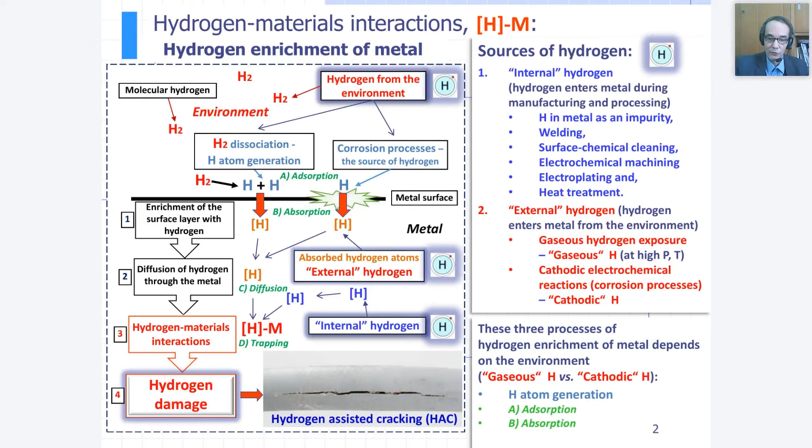What components are affected? Particularly tubes and pipelines in the power and oil and gas industry, also military aircraft, all components exposed to seawater, also automotive components are exposed to hydrogen embrittlement. Of course, different parts of the hydrogen chain, like hydrogen refueling stations, pipelines, as I mentioned, also fasteners. And at the end we have hydride embrittlement, which is typical for metallic alloys used in nuclear systems, and I will not talk about that.

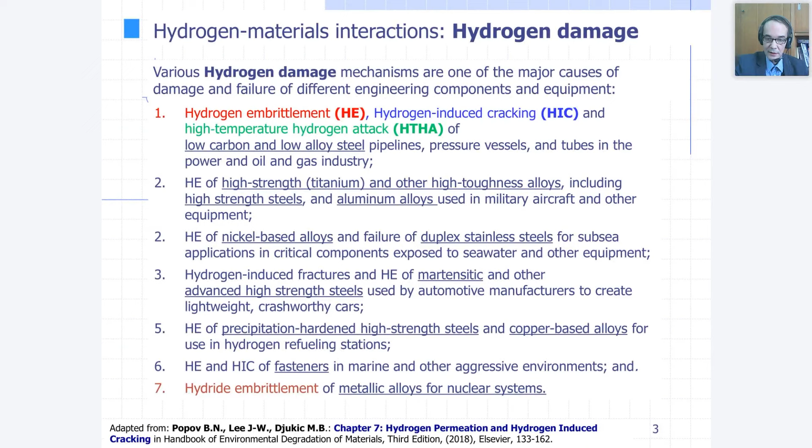Almost all structural materials are affected by hydrogen embrittlement and other hydrogen damage mechanisms, like low carbon and low alloy steels, also advanced high-strength steels, martensitic steels, and other grades of steel, but also aluminum alloys, nickel-based alloys used in seawater and other equipment, and also copper-based alloys. But recently it has been confirmed that high entropy alloys are also very susceptible to hydrogen embrittlement. So there are a lot of mechanisms and a lot of materials which are prone to hydrogen embrittlement.

What is the definition of hydrogen embrittlement, to make a clear distinction between hydrogen embrittlement and other hydrogen damage mechanisms? Hydrogen embrittlement can be defined as hydrogen-caused deterioration of mechanical properties of most metallic materials. So hydrogen embrittlement is one mechanism of hydrogen damage—the degradation of mechanical properties of materials, particularly a loss of ductility and sometimes a loss of tensile strength, but not always, which results in a decrease in fracture resistance and fracture toughness of the material, which finally produces subcritical cracking from the presence of dissolved hydrogen and various hydrogen embrittlement mechanisms. It's important to know that fatigue crack growth rate can also increase by over an order of magnitude in steel, and we will talk about this later.

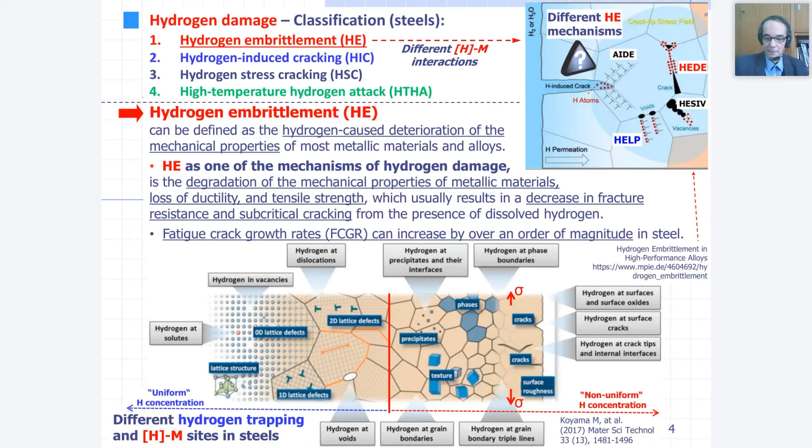When we talk about hydrogen materials interaction, we make a distinction for hydrogen-assisted cracking, which is primarily related to the degradation of crack propagation resistance, leading to failure of the components.

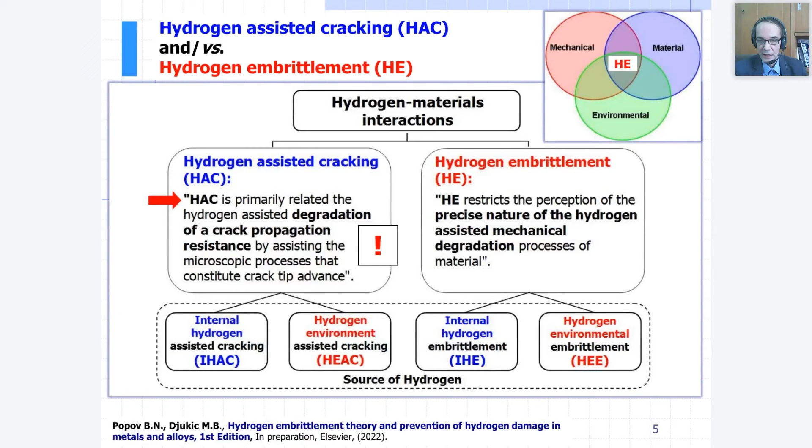So hydrogen enhances plasticity in material, not brittleness, according to this mechanism. On the other side, contrary to this, we have the HEDE mechanism, hydrogen enhanced decohesion.

We have a high accumulation of hydrogen, which provokes decohesion, meaning a drop in the cohesive strength of the material due to accumulation of hydrogen at particular trap sites, like the particle-matrix interface, pre-existing voids, or grain boundaries. As you can see, hydrogen promotes the decohesion of the grain boundaries.

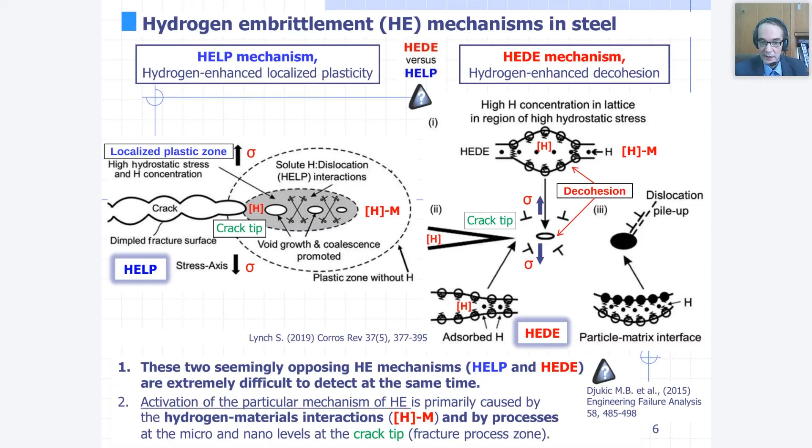As a summary, activation of a particular hydrogen embrittlement mechanism is primarily caused by the very complex hydrogen materials interaction shown in the previous slide, and by the processes operative at micro and nano level at the crack tip, marked in green, exactly in the fracture process zone.

So, HELP mechanism, and on the other side we have a question mark for HEDE mechanism. A group of researchers from the University of Belgrade in 2014 and 2015 proposed the now widely accepted and highly cited HELP plus HEDE model, about the synergistic action of both HELP and HEDE mechanisms in materials.

As you can see, what's important is hydrogen concentration. At critical hydrogen concentration, we have a change of mechanism from HELP plasticity-mediated dominance to HEDE decohesion.

At hydrogen concentration on the local level in material below the critical value, meaning low or medium hydrogen concentration, we have plasticity-mediated fracture modes of material, meaning that the local critical hydrogen concentration at the trap site is mediated by hydrogen enhanced plasticity. So we have hydrogen plasticity mediated mechanisms. HELP is not the only one.

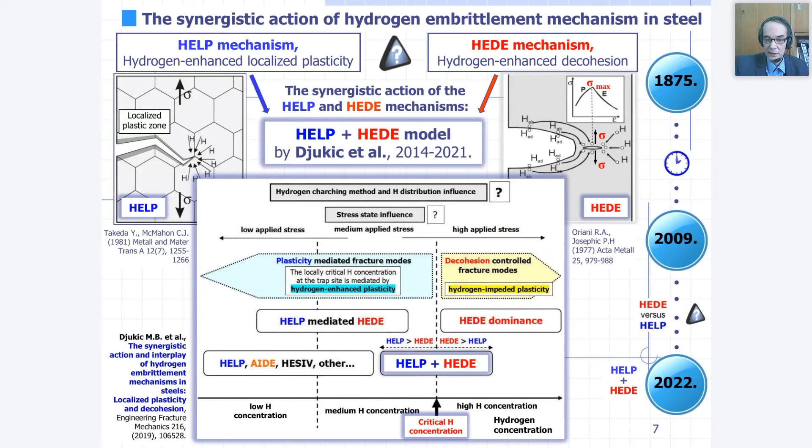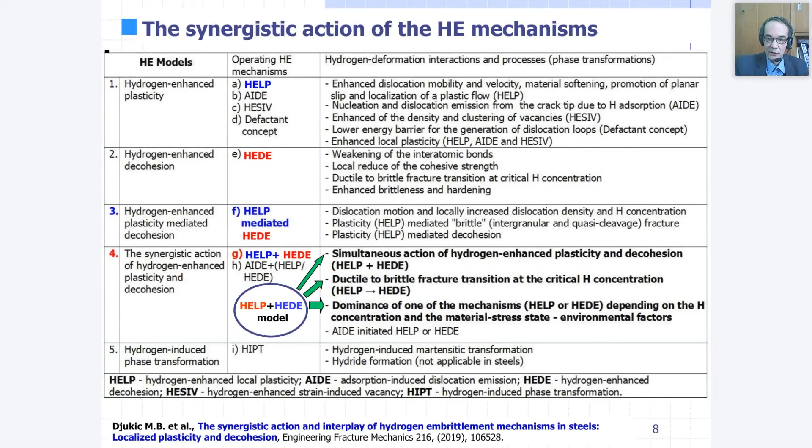Also published in our review paper about the hydrogen enhanced plasticity mechanism, HELP, and others about HEDE, and summary that the HELP plus HEDE model proposed that simultaneous action of both mechanisms are responsible for hydrogen embrittlement. The ductile to brittle fracture transition appears at a critical hydrogen concentration, and the dominance of one of the mechanisms mostly depends on the hydrogen concentration in material, marked in red on the previous slide, and also the material stress state and some environmental factors.

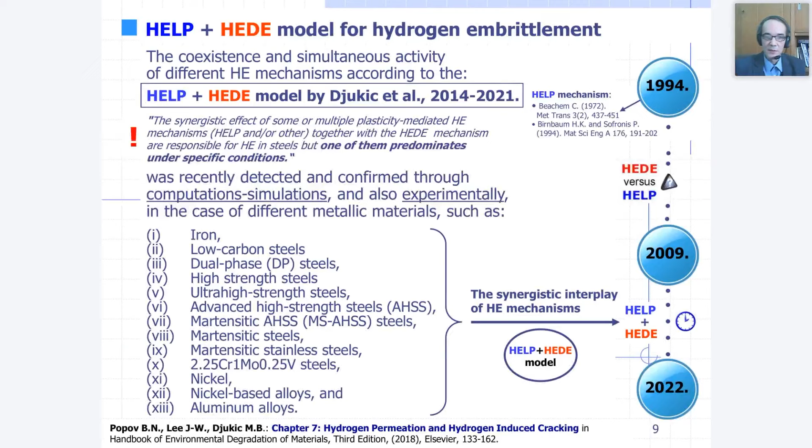So as a summary, our HELP plus HEDE model was recently confirmed in various metallic materials by experimental tests and also through computations and simulations. It is confirmed in various types of steel - high strength steel, advanced high strength steel, dual phase steel, low carbon steel - also in iron, and more recently in nickel-based alloys and aluminum alloys. So the synergistic interplay of hydrogen embrittlement mechanisms tells us that multiple plasticity-mediated hydrogen embrittlement mechanisms, HELP or other, together with HEDE, are responsible for hydrogen embrittlement, but one of them is predominant under specific conditions.

As a summary about mechanical properties according to our HELP HEDE model, we have a critical hydrogen concentration on the x-axis, and we have two cases: the actual hydrogen concentration below or above the critical hydrogen concentration. At reaching the critical hydrogen concentration, we have a ductile to brittle fracture transition and sharp drop of macro and nanomechanical properties. As you can see on the down left microstructure figures, we have a typical pure brittle fracture characterized by intergranular and transgranular fracture features and micro cracks when we reach an actual hydrogen concentration above the critical.

So the affected mechanical properties are tensile stress, yield stress, but not always - in some cases there is no big change in tensile stress or yield stress, but ductility is almost always affected, and elasticity, and most importantly, the crack propagation component, which means the fracture toughness of the material sharply drops, which finally provokes fracture of the component due to activation of the decohesion mechanism.

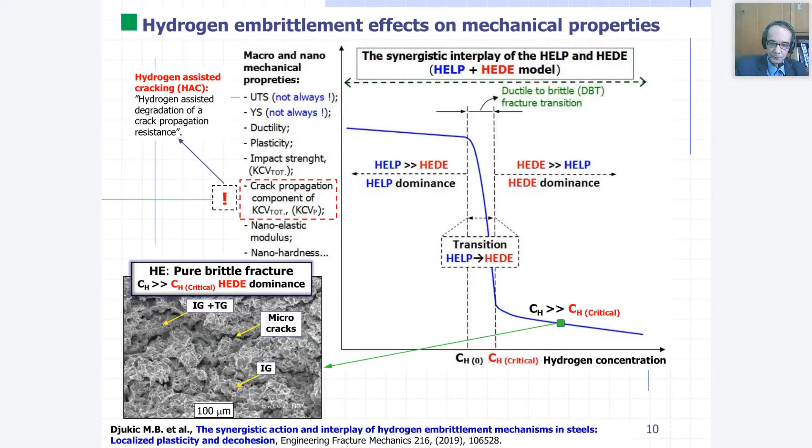So hydrogen blending into the natural gas grid is a very important industrial topic. Currently, as we can see in the upper middle section, we have more than 70 ongoing projects in Europe related to retrofitting and repurposing gas infrastructure, in order to transport mixtures of gas with hydrogen in existing pipelines. The affected lines are gathering lines, transmission lines, and also distribution lines, but particularly lines with high pressure hydrogen gas mixture.

As you can see, natural gas electrolysis and the petrochemical industry insist on blending, particularly methane with hydrogen, in order to provide various hydrogen technologies. But as you can see in the lower part of the slide, we have hydrogen damage mechanisms. Down left, we can see hydrogen natural gas mixture transportation, or 100% hydrogen transportation in existing gas pipelines, and we have three typical hydrogen damage mechanisms.

The first one is hydrogen accelerated fatigue crack growth. The other one is hydrogen induced cracking - I will not talk a lot about this mechanism. And hydrogen embrittlement, which is very important, shown in the down right picture.

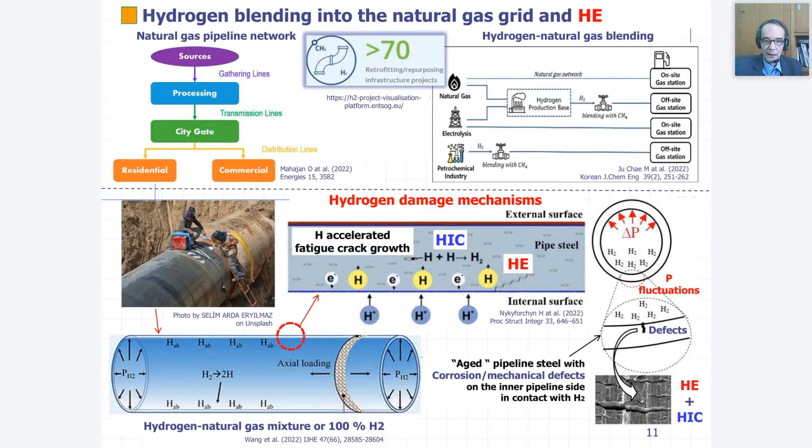What about hydrogen blending? A very hot topic. As you can see in the middle of the slide, there is still no harmonization of allowable hydrogen concentration in natural gas in European Union countries. As you can see in the upper left part, we have various allowable volume percentages of gaseous hydrogen, which could be in the mixture from 1% up to 10%, and recently 20% of hydrogen is allowed.

As you can see in the down left slide, various blending concentrations are allowed in different European Union countries, and currently we have many demonstration projects presented in a table, being performed around the world - in UK, in Europe, but also in Australia, United States - in order to check the blending ratio, volume percentage of hydrogen from, let's say, 2% up to 100% pure hydrogen transportation.

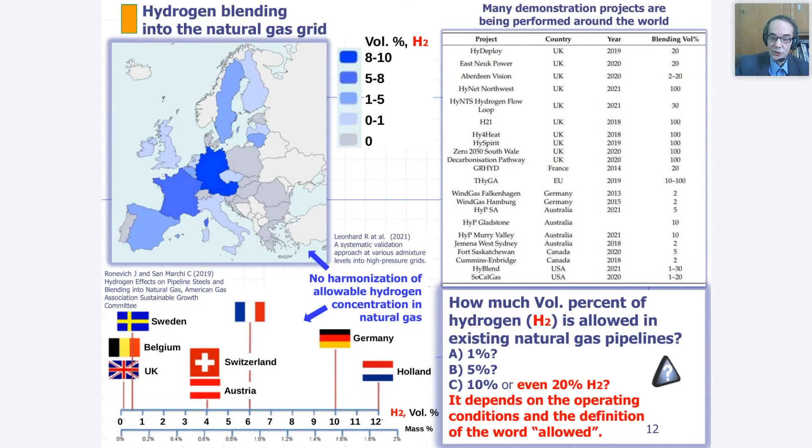So the question is: how much volume percent of hydrogen is allowed in existing natural gas pipelines - is it 1%, 5%, 10%, or even 20%? The answer is it depends on the operating conditions and the definition of the word 'allowed'. When we talk about materials, here is the slide about pipeline steels and hydrogen embrittlement.

As you can see in the down middle section, we have evolution of the strength and processing microstructure of various pipeline steels with time, including low grade, older pipeline steels like X42, X46, X52, up to the very modern high strength steels for pipelines like X80, X90 and others.

In the pie diagram on the upper left part, you can see that in the European Union various grades of pipeline steel are used in percentage, but almost all are up to X70. So the newest ones are still not in use in Europe.

As you can see on the diagram of failure elongation for different grade materials, it is obvious that failure elongation, which is a measure of plasticity, drops significantly in the case of high strength steel. Ultimate tensile strength rises with the modern steels, and we have a sharper drop of failure elongation in the case of X100 in comparison with the older, more ductile and lower strength steels like X42 or X52.

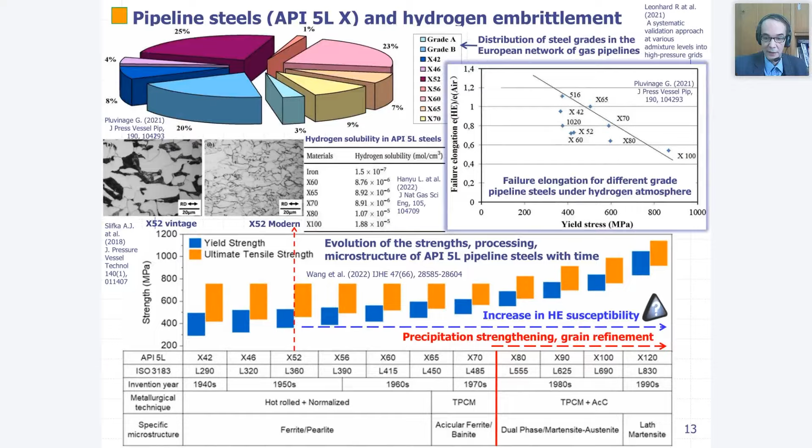So, hydrogen blending into the natural gas grid and hydrogen embrittlement. The first question on the left is, is there a threshold below which the hydrogen effect can be ignored? The immediate answer is no, because even 1 bar and 1% in a blending mixture of hydrogen reduces the fracture resistance of steel.

So 1% hydrogen blending is only modestly different from transportation of 100% pure hydrogen. As you can see on the diagram, we have a fracture resistance drop by 50%, even in the case of 1% blending. This is the data for X70 steel, with an additional but small drop when we raise the blending ratio up to 10 or finally 100%.

The next question is, what about the hydrogen effect on fatigue crack growth rate? Because pipelines are exposed to pressure cycling and also fatigue. The immediate answer is that small amounts of hydrogen can have substantial effects on fatigue. Acceleration of fatigue crack growth rate is detected with only 5% hydrogen in the mixture, with an additional small acceleration with higher content. We can see that on the lower middle part of the slide.

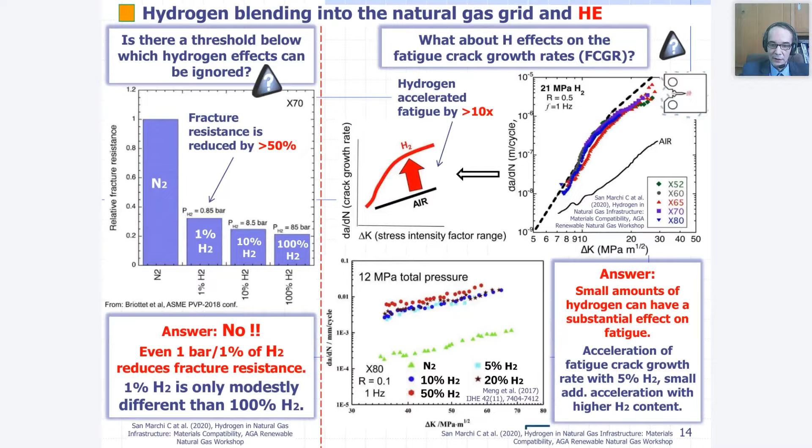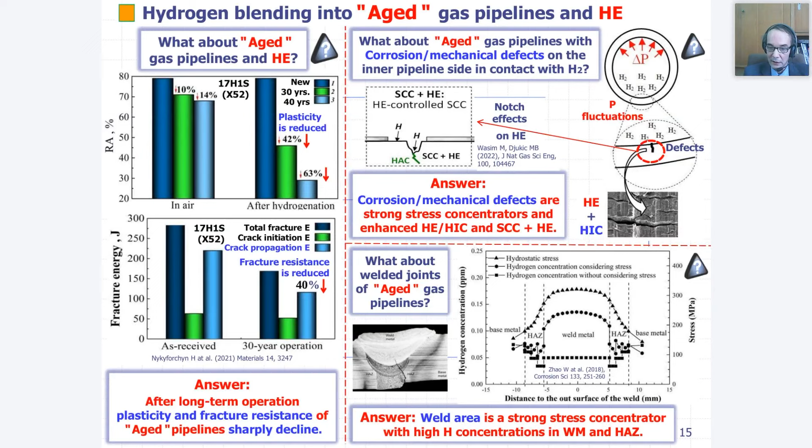So the answer is that the weld area, as a strong stress concentrator, represents an area with very high hydrogen concentration and is also prone to hydrogen embrittlement, particularly in the weld metal and heat-affected zone. So how can hydrogen embrittlement be predicted and avoided?

That's the most important thing for industry. As you can see, we have points 1 and 2, and 3 and 4. When we talk about hydrogen embrittlement mechanisms at the atomistic and nanoscale level, it's important to note that maintenance engineers and industry people don't care which hydrogen embrittlement mechanism is active at the nano-atomic scale. They only care whether and when their components will fail due to hydrogen-materials interaction, and they need practical tools.

On one side we have the scientific approach, the phenomenological research of hydrogen-related degradation. As I previously said, there is still disagreement about hydrogen embrittlement mechanisms, and we deal with very complex hydrogen entry into the metal and various hydrogen sources. Scientists investigate these aspects, but we need to provide a practical tool for the industrial sector: an effective structural integrity model for prediction and preventive maintenance of industrial components exposed to hydrogen.

So we need to form a structural integrity and predictive maintenance model for industrial application, based on the multiple active confirmed hydrogen embrittlement mechanisms according to our HELP plus HEDE model, connected with easily measured micromechanical behavior of material, and to define the so-called critical hydrogen concentration for a particular application and steel, in order to provide reliable and accurate life and damage prediction models for components like pipelines and other industrial components.

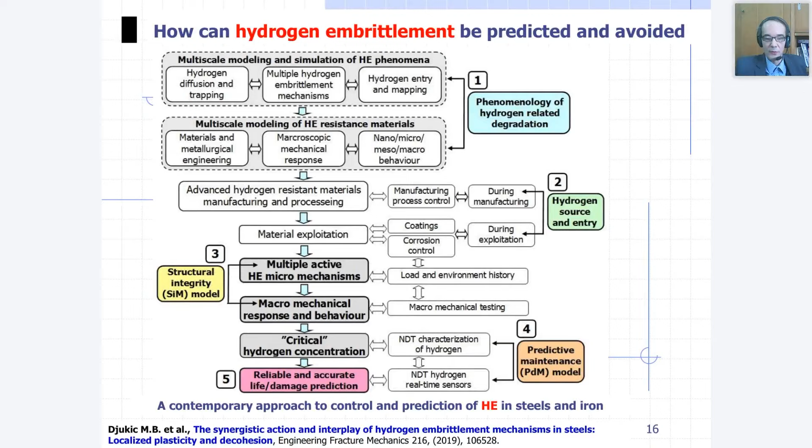Here is my proposition of how to do that. What we need in the case of pipelines with some blending ratio, or 100% hydrogen transportation pipelines, is a comprehensive technical and scientific assessment program for retrofitting the natural gas grid for hydrogen transportation.

So we will start with the key factors. What are the three most important key factors shown at the bottom middle? As previously explained, the combination of mechanical, material, and environmental factors provokes hydrogen embrittlement. The most important mechanical factor is the global and local stress level, pressure cycling in pipelines, and cyclic loading, which generally produces fatigue, and as I explained, enhanced fatigue due to hydrogen embrittlement.

We also need to investigate the presence of stress concentrators like existing corrosion damage in aged pipelines and welds. What about material? The hydrogen embrittlement susceptibility of steel is very important and differs for different steel types depending on microstructure and numerous other parameters. As for environmental factors, we need to determine the global and particularly local hydrogen concentration in steel, and compare it with the so-called critical hydrogen concentration, to avoid a sharp drop in mechanical properties upon activation of the embrittlement mechanisms.

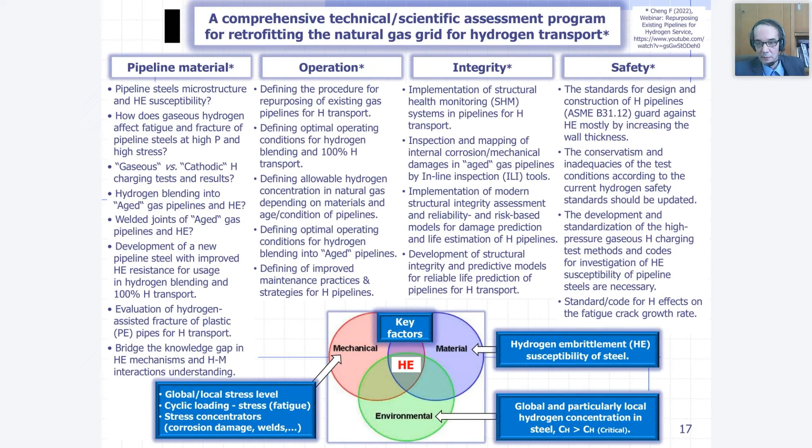Summary: hydrogen degrades the mechanical properties of most metallic materials. Materials compatibility for hydrogen service depends on the application and the design.

Retrofitting and repurposing existing gas infrastructure that allows the injection of a certain amount of hydrogen blending, or repurposing, which means converting existing natural gas pipelines into 100% hydrogen pipelines, is a very hot and interesting topic. It is widely believed that existing gas pipelines retrofitted for transportation of gas-hydrogen mixtures, or repurposed for 100% hydrogen transportation, are a viable and safe option for long-term future usage.

However, despite the fact that gaseous hydrogen transport via existing gas pipelines is a low-cost option for delivering large quantities of hydrogen, I want to point out that there is a serious threat of hydrogen damage and catastrophic failure, particularly for old-age gas pipelines, and particularly after future long-term service and transportation of hydrogen in, for example, gas pipelines with pre-existing defects on the inner side.

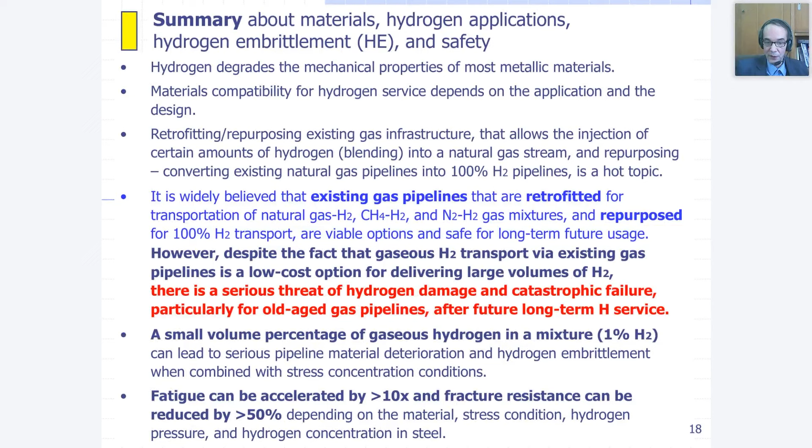So the allowable hydrogen natural gas blending ratio is not a predefined parameter, and depends on the operating condition, the pipeline material, and most importantly, on the age and condition of the existing gas pipeline which should be converted to blending or 100% hydrogen transportation.

The lower grade pipeline steel with lower strength and higher ductility, the older one, is not safer per se for hydrogen transportation in comparison to higher strength modern pipeline steel, since they are still very prone to hydrogen embrittlement depending on microstructure and other factors.

So there is a need for a demonstration project on suitability of both older, low-grade and modern high-grade pipeline steel for use in high-pressure hydrogen transport for the long term with very high safety, in order to provide reliable exploitation of hydrogen pipelines. It is also important to investigate the hydrogen embrittlement susceptibility of the old steels in older pipelines.

So we need a comprehensive technical scientific assessment program, as I presented, which must be developed and applied to examine the suitability, integrity, and safety of existing aged and new gas pipelines for both hydrogen blending and future 100% hydrogen transportation. As you can see, only 1% could have a substantial effect on mechanical properties in the gas mixture.

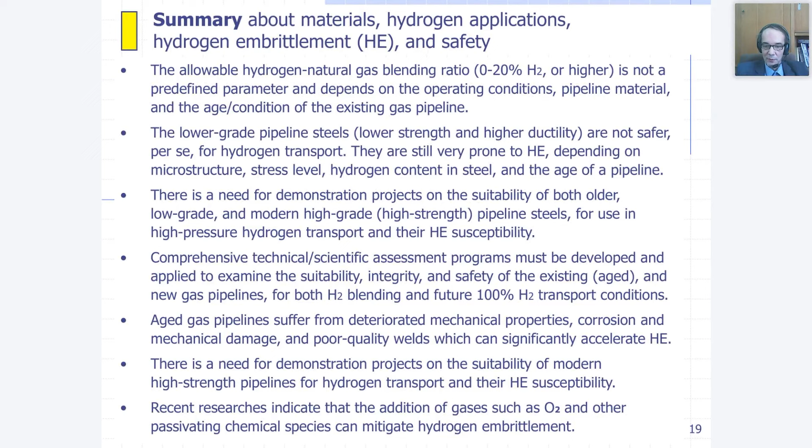And finally, there is some recent research which indicated the addition of gases such as oxygen and other passivating chemical species can mitigate hydrogen embrittlement in the case of hydrogen transportation in gas pipelines.

So thank you for your attention.

You can see here on the last slide selected books, chapters and papers by a group of authors from University of Belgrade, in cooperation with some foreign institutes, with Australian partners, and we have a plan for future work with some other European Union partners. You can see here my email if you need to ask some additional questions after this webinar.

Thank you very much for your questions. I'm open for the question and answer section.

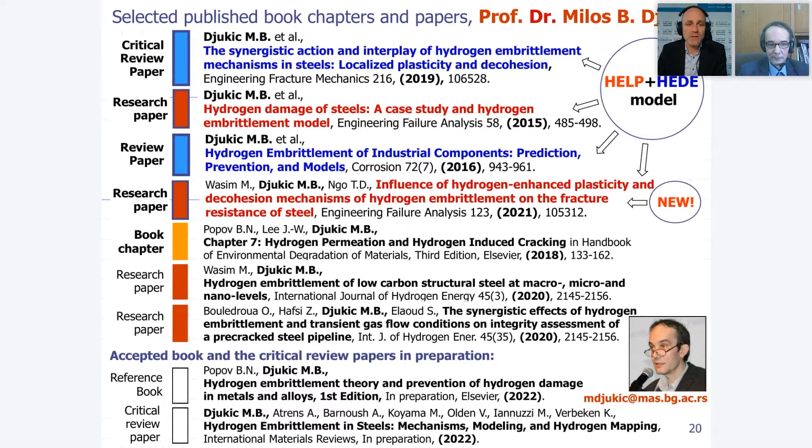Wow, thank you very, very much, Milos. That was an amazing presentation. But let me be very honest, from my perspective it was also very, very challenging to understand. So I think I need some more time to really let it sink in and understand it.